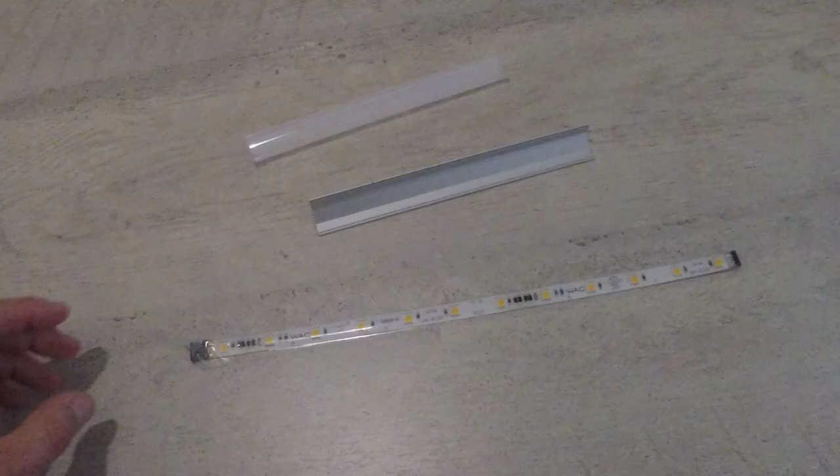So I like to use this WAC LED strip. In my case, I've been using this InvisiLED light, which is the least expensive of these strips because it's the least powerful, but for accent lighting it's plenty bright enough. And it's got adhesive on the back.

And so what I've done in the past, for instance, is this cove lighting up here, which worked out really great. I put it normally in the 45-degree channel, but sometimes in the straight channel. Here's some more lights that are using LED strip with a Z-Wave dimmer, and then they're controlled with SmartThings.

So I'd like to install the accent lights on these two walls right here where the bookshelves are. And what we have at our disposal, we have these light switches right here that operate the three different sets of circuits for these downspots, and we'll probably end up redeploying one or more of those switches. So now, how do we get power up here?

Down here looks like a good opportunity, but these outlets in here are dead as a result of a prior remodeling in which the power was disconnected, and so I cannot get that reconnected directly the way it was before.

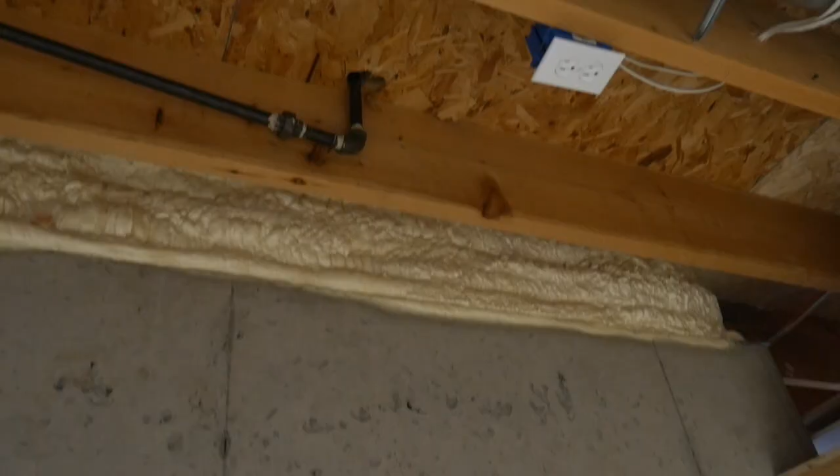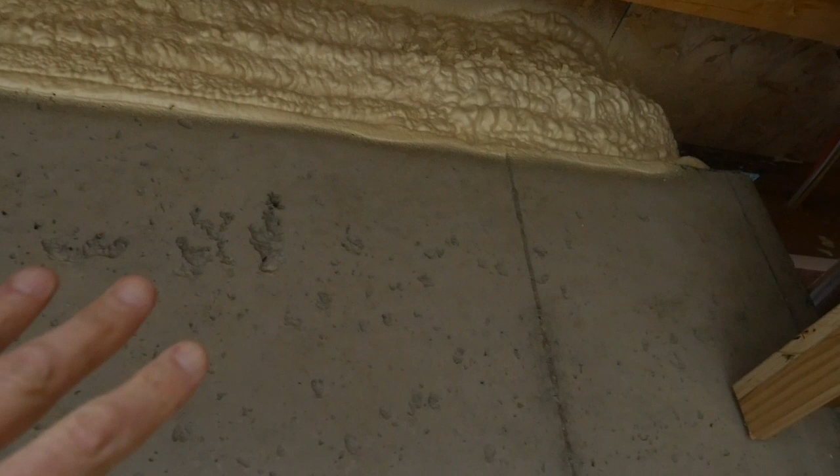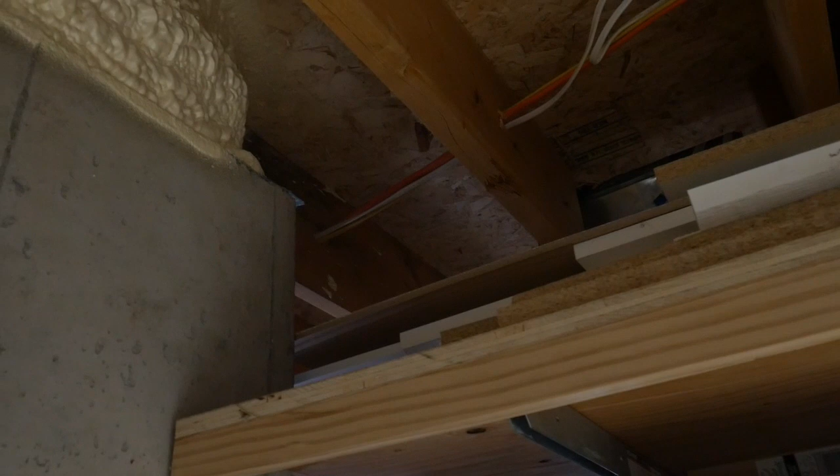We're now in the basement below that space, and this is where the fireplace is. You can tell by the gas line that goes in. The back wall is a little bit deeper than this foundation, a little bit further that way. And the other wall, you can tell approximately where that is by where that duct is. So we're going to be able to put a hole into the floor right about in that area there, and we'll be able to connect to power.

And I've got some slack in that wire right there, which is a circuit that is hardly used. So I plan to connect into that circuit to get the power up there.

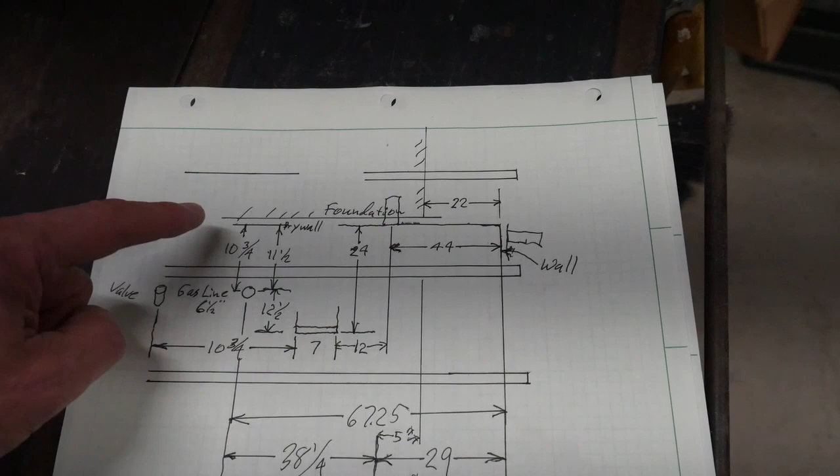I made myself a plan. Now this isn't to scale, but this is an upper view showing where that gas line is, and then where the foundation is and where it ends, and then where the drywall is upstairs is right here. So the center of that space is roughly a little bit inside of the foundation. And this space right in here is where we want to take advantage of this to get a hole drilled through there.

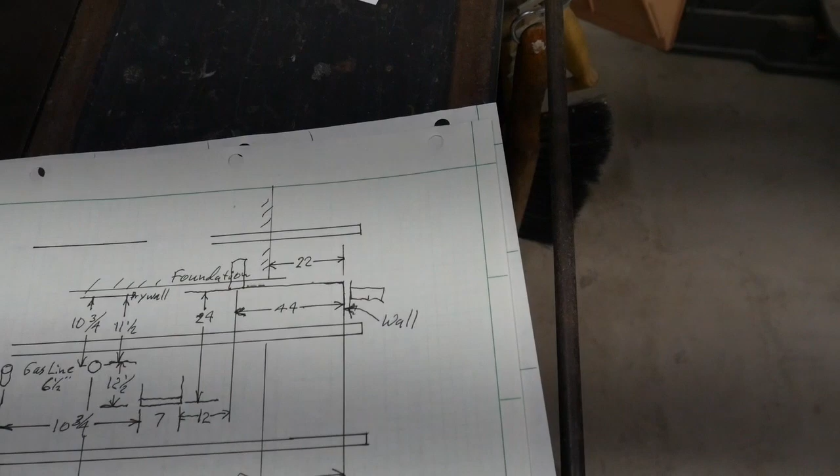And so I blew that up a little bit more and drew it more to scale to show where the studs are in the wall upstairs, and here's where the opposite wall is, and this space right here is the one that we want to reach into and get a line through. So I'm going to do even more measurement and make darn sure I'm going in at the right spot before we drill that hole, but it looks like we've got a window of opportunity to get some power up there.

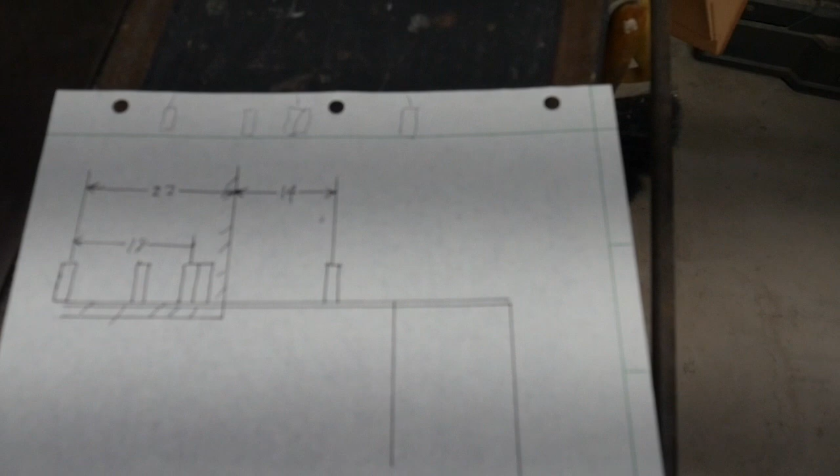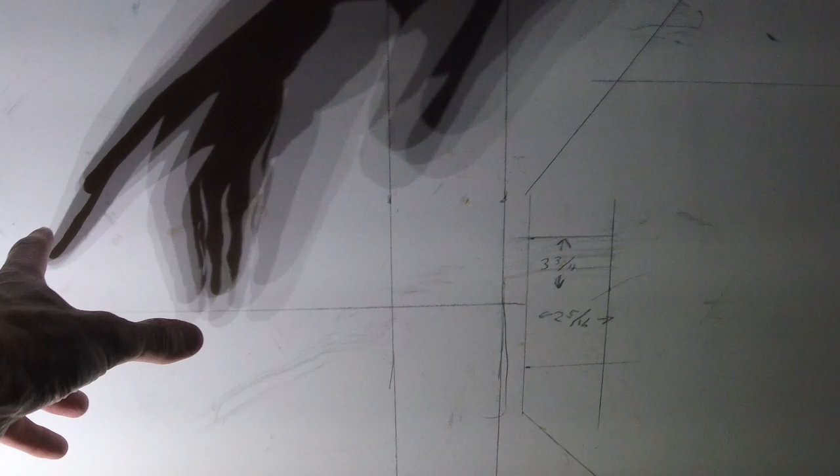So here's our mapping out of this wall. There are two studs right here, there's one right there, and there's another stud right about in here. If I can get access to wire and go to a box right here, great. If I don't, I'm going to have to cut out another hole right here to help span the wire across between these two boxes and across all of these studs. But I'm going to wait on this one until I find out what's going on in here.

And as far as the box goes, I'd prefer to put it directly into the stud with this. Otherwise, my option is to go with one like this where you just grip on the drywall. But that depends on what I'm worried about: the remote chance that there's a wire coming from this one that comes out right there. So I need to open up the wall and then make a game time decision on exactly where this box is going to go.

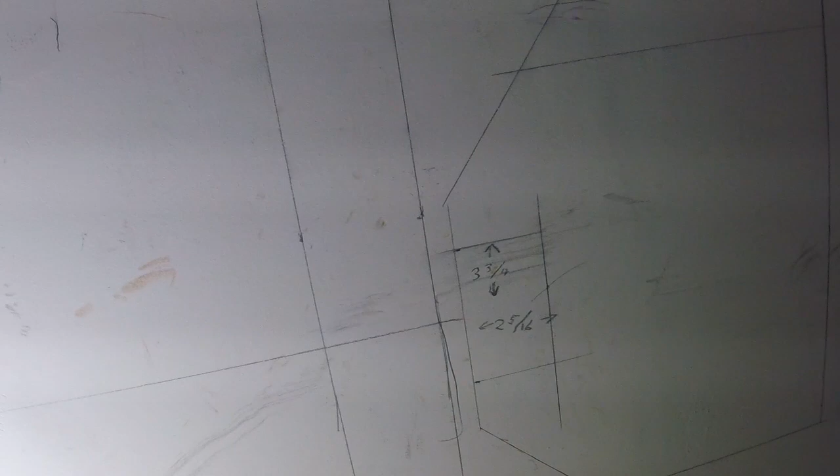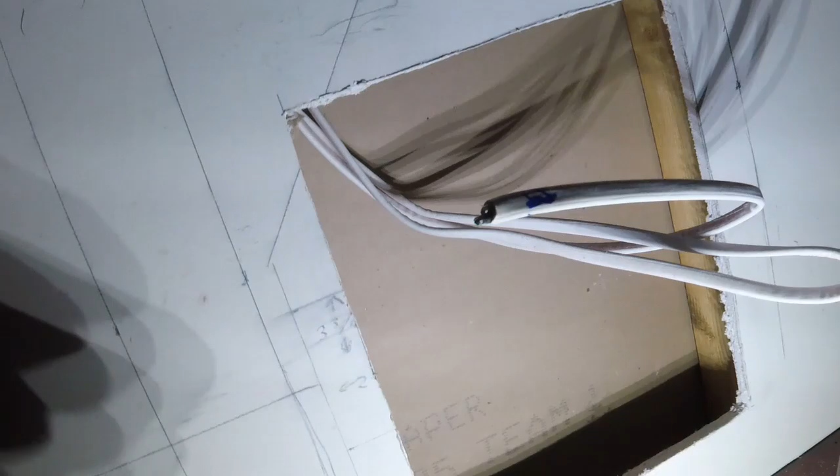So I cut this piece out. That worked fine. I used a really sharp utility knife, and I found out what was causing the stud finder to react up here. It was these wires. I pulled them out and got lucky. They were easy to pull through, and they've got enough slack in them that I'll be able to connect them into this box that we're going to add.

So now the problem is, what are these wires? I confirmed with a continuity check that this wire is connected to that outlet and the other one, so that one needs to be live, but I have no idea what these are, and I can't find anything that's not working right now. So it could have been provisions for something for the future, or maybe one of them is for this fireplace here or something like that.

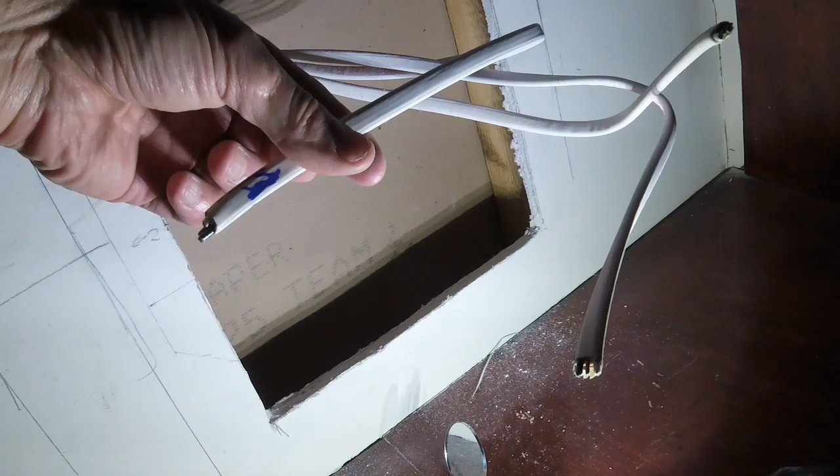So what I'm going to do is put in the new box, connect this live to power, and these two, I'll bring them in the box, but I'll just put wire nuts on the wires and mark them as unknown, because I have a feeling someday I'll discover what those are for.

So I've estimated the drill depth to go through that 2x4 and past the subfloor underneath needs to be in the ballpark of 2 1/4 to 2 3/4 inch long, so I've got just as small of a drill as I could find to get that length.

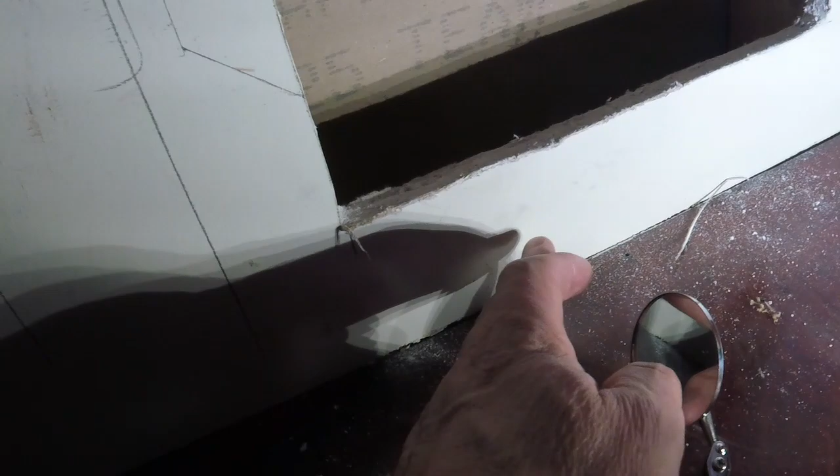And then the second thing is where to put our hole down there. The foundation ends right about here, and there's some wires downstairs right about here. So I'm going to put that hole right about in here, so I'm comfortably clearing the foundation and not going to get in the way of those wires down there.

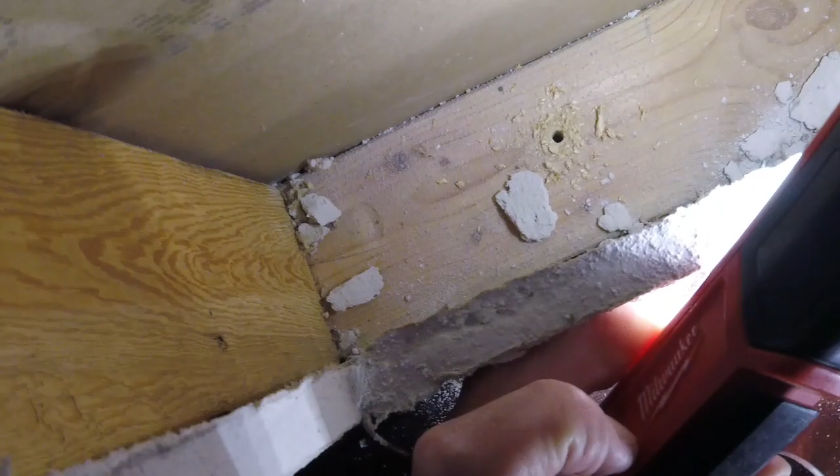So I just drilled that hole, and I could feel it go through, so those calculations were about right. So what we'll do now is set this light over the hole and then go downstairs, see if I can find it. And there's our hole right there, and that's pretty much where I expected it to be. Now I can go through with a through hole with confidence, big enough to put some Romex through it. Alright, that bit's big enough for the cable to go through it. So I decided to use my big drill for this.

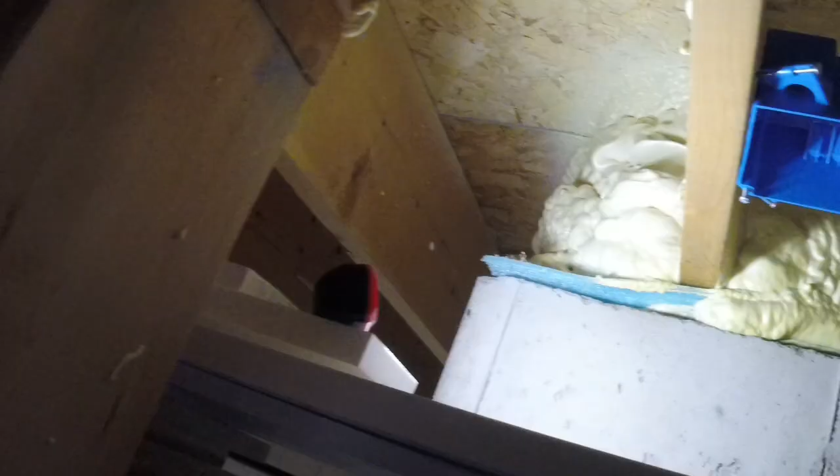Alright, we got our junction box in, and I poked through one of the openings here, and you can see we got plenty of room to make a connection in here. And I can fit the cable through there and then go up through that hole. So let's go ahead and start routing some cable.

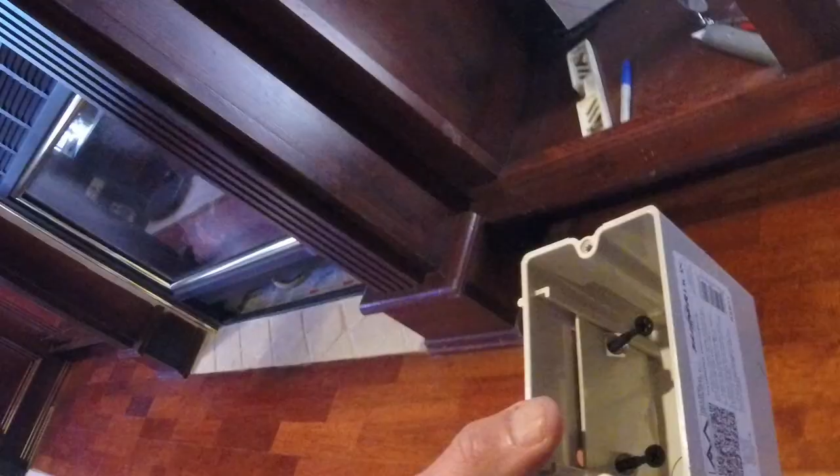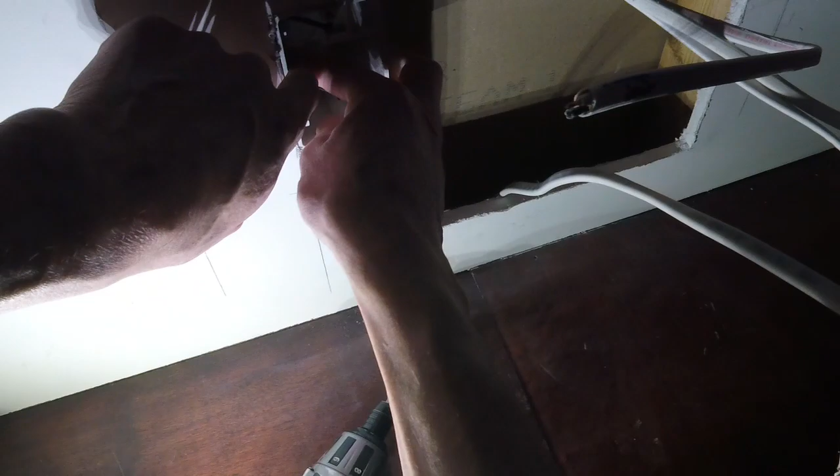Measured the height of that box, and it's right at 3 3/4. So my marking there is 3 3/4. I'm going to go a little bit bigger than that, and then cut all the way to the stud, and then we'll secure this to the stud. Okay, I've got these things positioned against the stud. I'm going to pull this out and run it into the stud.

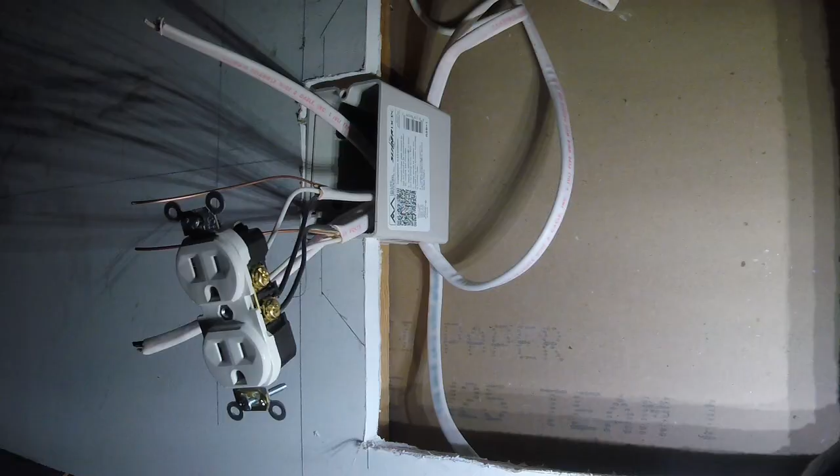We've got incoming power coming from below, and then I've also got the one that I marked as being associated with the plugs, and I've connected those both to this outlet. And then as a double check, let's make sure we've got continuity between the old plug and this, and we do, so we do have the right connection made.

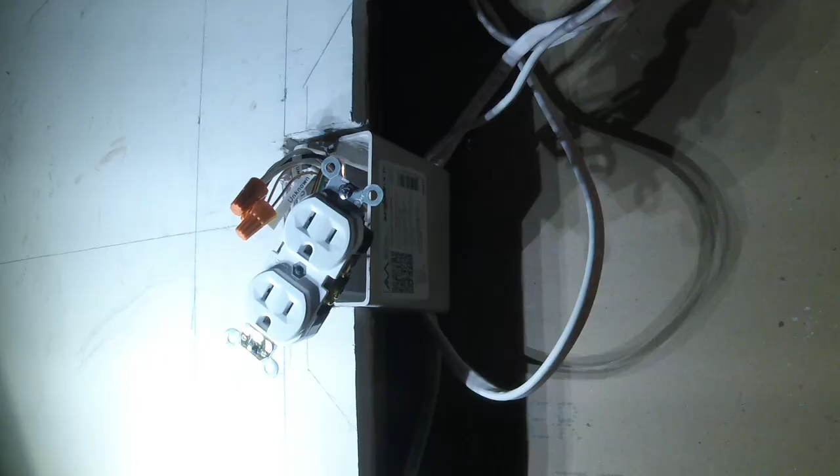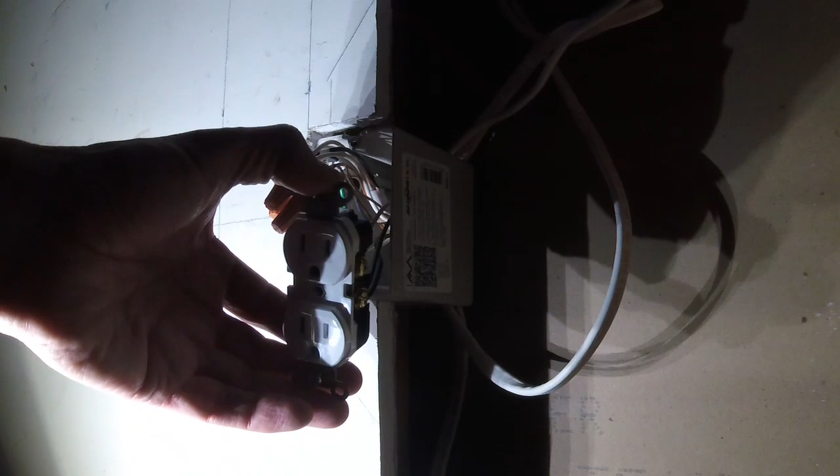So I got this wrapped up now. The unknown wires are just tied together, and I got them labeled and saying which way they're headed, east. And then this one I've now got wired to the power and to the outlets. So now we're ready to button this up, and then we'll get our piece of drywall that we've cut out, get it back in. I'm going to go ahead and change this other outlet out too.

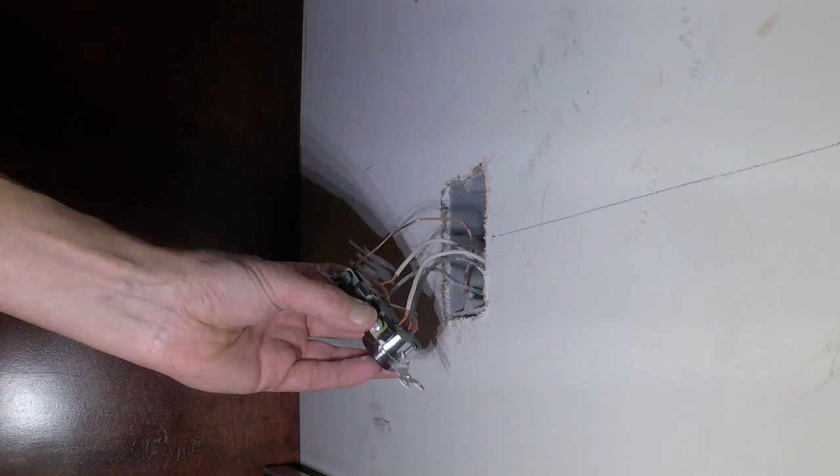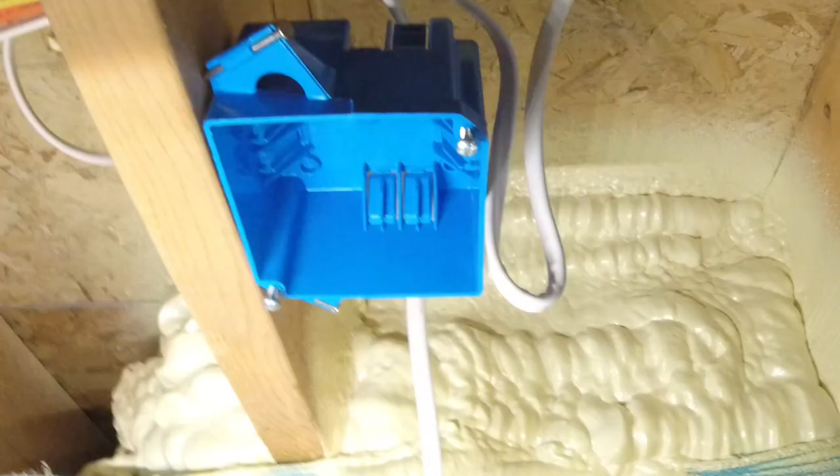I don't know if electricians have a special tool for this, but I ground down a screwdriver that would fit in that slot. Now we're ready to connect power to this wire in this junction box. And so this is the circuit that I want to go into, which is that lightly used circuit that goes upstairs. The thing is, I'm like 99% sure which circuit breaker is connected to this circuit, but I need to be 100% sure before I cut that wire.

So I plugged in a heater upstairs into that circuit, and then I put this on here, and I can see, yep, we're getting a lot of current through there, and there's another wire with no current in it, so plenty of current in this one. So then if I turn off that circuit breaker and come back here and there's nothing there, then I've got the right circuit.

I flipped off the circuit breaker. The heater upstairs is off. I'm getting no signs of current in this thing. So I think that we are okay to cut this. Let's hope for the best, huh? I've cut those before accidentally when they were live, and I can tell you that's a good way to ruin a pair of dikes and scare you.

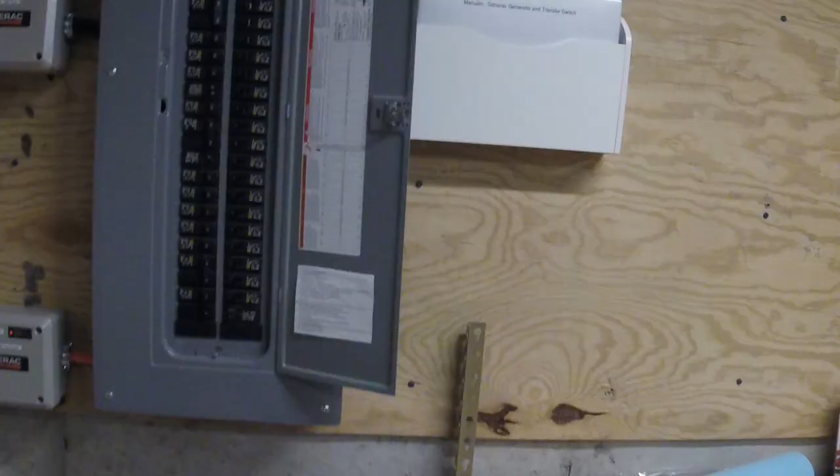Got the wiring all done, so we'll go flip on the circuit breaker, go up and check everything, and if it's okay, we'll put the cover back on this junction box. Okay, let's turn our circuit breaker back on. So far so good. I checked the lights in the other room. They look good. This looks good.

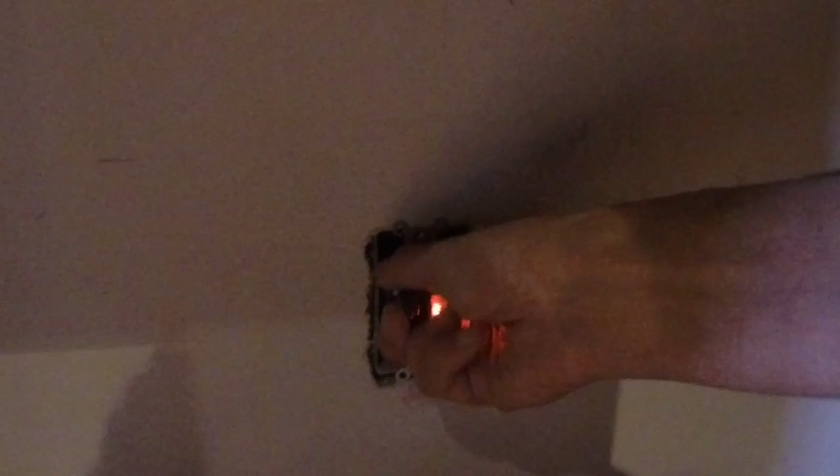That looks good. Alright. I put a fresh blade on this knife and then ran it along the inside edges and the outside edges so that we got a little bit of a chamfer, particularly on the outside, so it's sub-flush, and then there's some place for the spackling compound to go. And then I measured, and we've got 3/8 of an inch right here where the box is protruding from the current drywall. So now I'm going to just cut this piece out.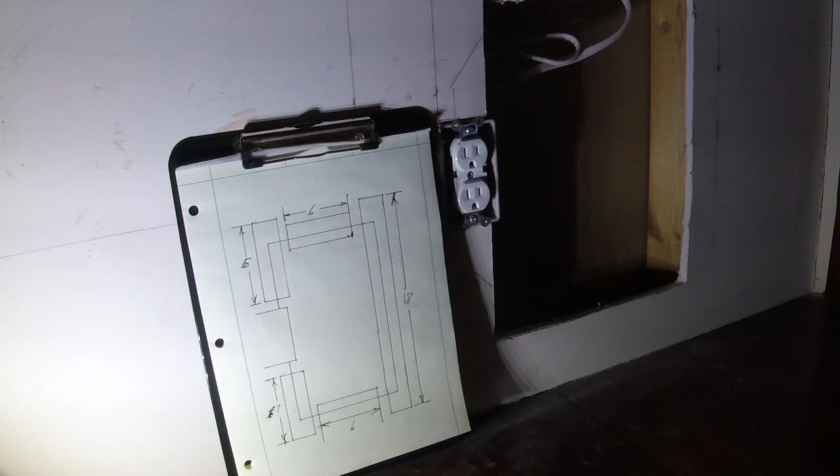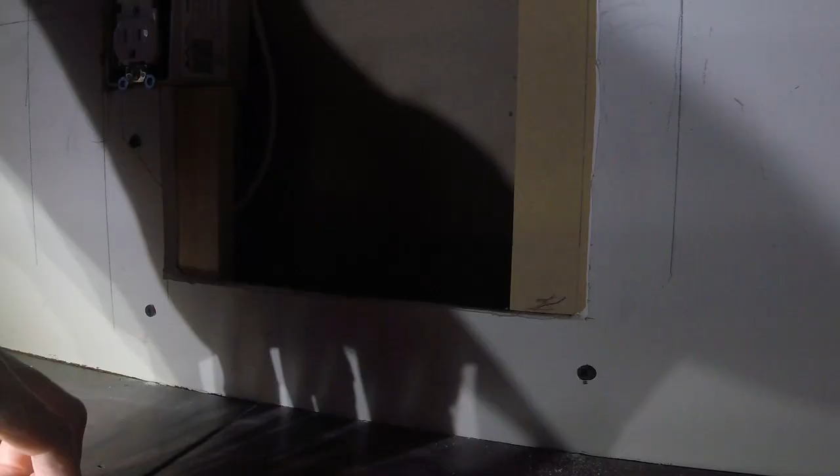So I'll put some strips of pine trim along the edges here, and so I needed a rough idea of our dimensions, so I've got a little map made here. So I'll go cut some of that trim, and then we'll get started putting this back together. Found a piece of scrap MDF, so I used that to make the pieces. The nice thing about this stuff is that it's really easy to self-tap into it. Start to put this MDF in.

So I put a mark roughly where it's halfway across, and this thing is 3 inches. So that means we've got 1.5 inches on either side, and so we need to go in about 3/4 of an inch to get to the middle of that. And I'm not cinching these up completely yet. I'm going to mark where these gaps are so that I don't try to put a screw in there. These look pretty good, so I'm going to go ahead and cinch these up so their heads are a little sub-flush.

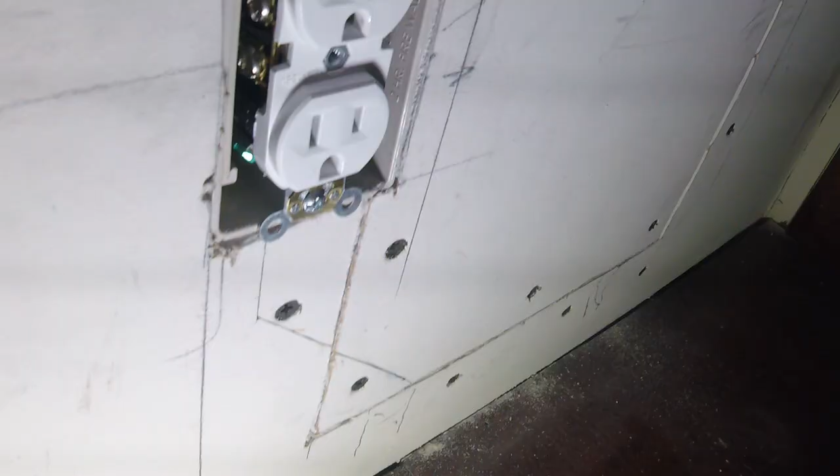Good. It's going to clean up well. So my wife thinks I'm terrible at sanding and painting, so she's taken over on this.

And I'll continue with the glamorous work where I need to route a wire from here basically up through the corner of this cabinetry. So I'll start drilling holes up through here until I get to the top. So that's the kind of connector that I've got to get up through the wood. And so instead of drilling a gigantic hole, what I'm going to do is drill 2 holes side by side and then clean it up to make it into a slot using a Dremel tool.

So there's a hole up in that corner there now that we can go up. And then on this level, for some reason, there's an extra support right here with a shorter shelf here. And so, problem is I can't get my arm around there, but I've got to get up past this, and then up here, we'll just fit in that gap behind the shelf. And then up here, I've got the hole in at the top.

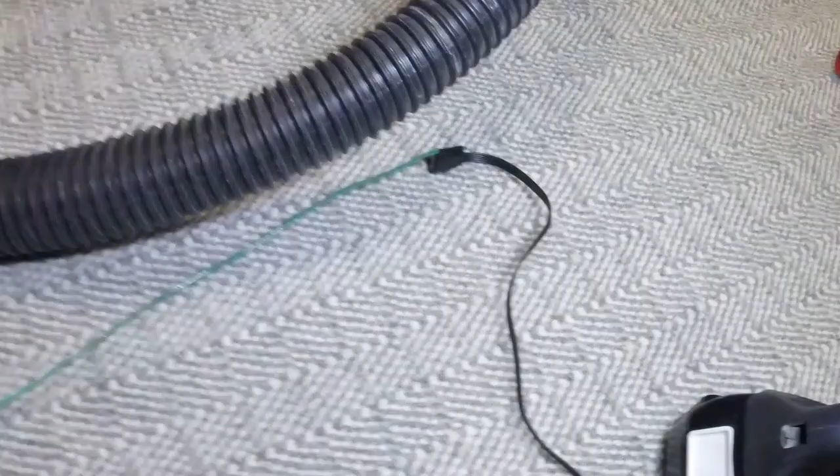So what I'm going to do is I put a wire on the end of this thing, and we'll push the wire up, and I'll be able to grab the top of the wire and then pull the rest of the cable up from there. So I was able to feed that wire up through that hole, and now you can see the green solid core wire there. So I'm going to grab that and pull it the rest of the way up, and then we'll feed it up through the upper hole.

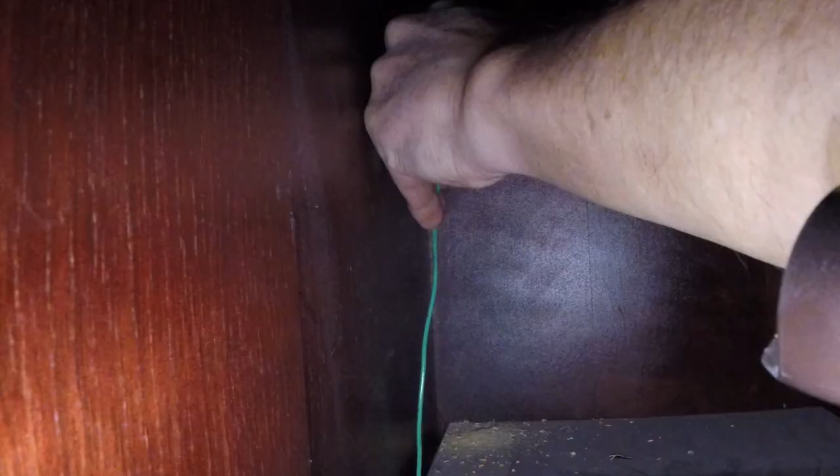Alright, I got one strip plugged in, and so it works, and it gives you a little bit of a feel for what that'll look like after we've got all the strips in. So my wife finished sanding and painting the wall, so it looks pretty good, and she wonders why I'm not done yet. I've got a little ways to go still. I got this Z-Wave dimmer installed and connected with the SmartThings, and it works pretty well.

So I'm going to adjust this dimmer with the SmartThings, and so I've only got a few pieces installed up there. But what I wanted to do was check on the pattern, because I was thinking about just putting in a 45 right here, and it might be simpler, but when I tried that I wasn't getting enough light in the corner, so I tried this, and yeah, sure enough, we get better light when we let these things overlap. So I'm going to follow the original plan and overlap these.

So I picked these up on eBay. So this is an aluminum channel with a diffusing cover on it, and then we'll lay the LED strip on that flat surface right there. So I have to cut many of these for the specific place where I'm putting them. So I've marked where I'm going to cut it, and to get the hacksaw started, I'm going to make a groove with the Dremel tool. So got a groove started there, and now we're ready to cut it with the hacksaw.

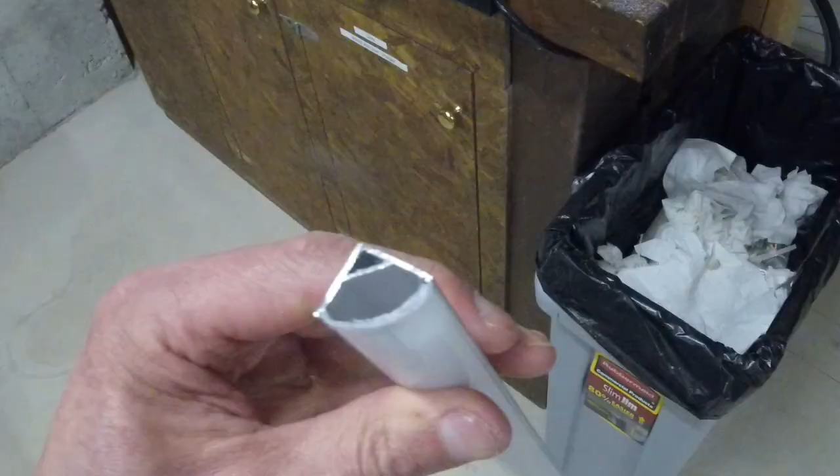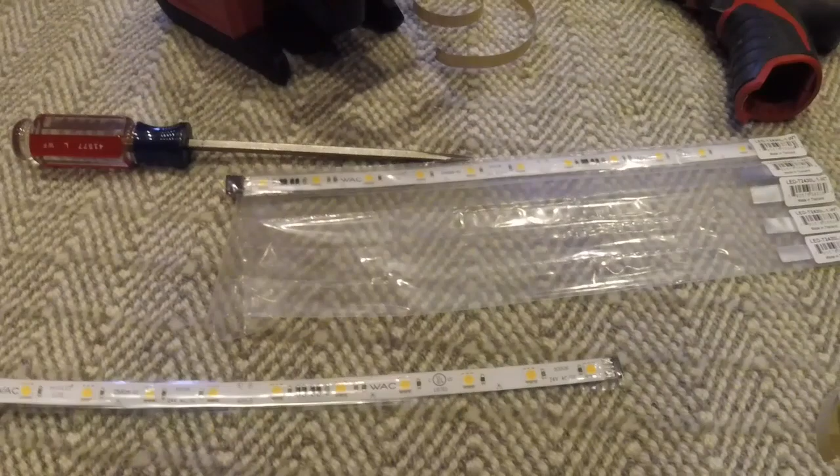Alright, it's cut, and I deburred it with a file, so we're ready to go assemble this. So you can get these LED strips in 1 foot, for example, or I bought a 5-foot strip here. It's a little bit more cost-effective per foot this way, and this is a pretty long run, so I will use the long one, and then I'll have to cut the end of it off.

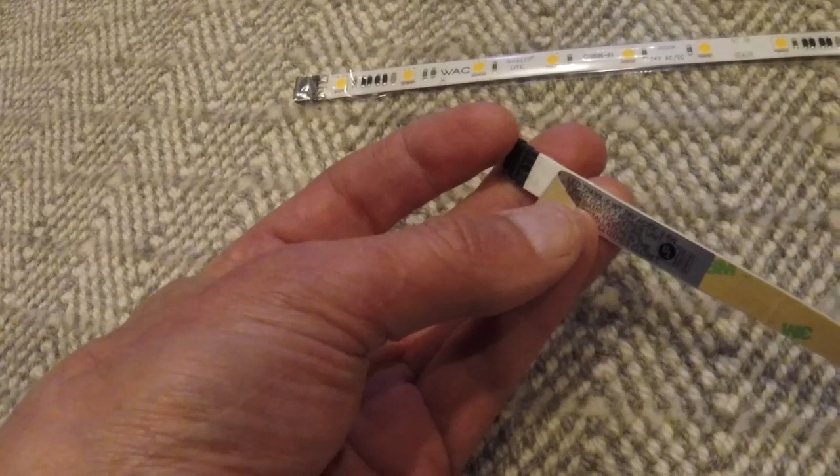So I got to peel off the cover here, and then this paper strip on the back is where the adhesive is, and then I've got to take the end off of that to expose the connector. So we've got the previous strips laid out here, and then here's the connector I'll have to put in here. So I'm going to start setting this strip down in this channel.

So these 2 aluminum pieces, I'm not planning to join them in any other way. I just lay the strip across it and let that hold it together. It seems to have worked pretty well on the other ones. This tape has these lines where it says where you can cut it, so I actually adjusted this a little bit so I could set that cut mark right at the end. So I'll go ahead and cut that now.

Alright, strip is cut and placed in the channel over here. Okay, got it plugged in and it's working. So now we'll put the diffuser cover on it. Alright, the diffuser's installed. Last thing is I get a little bit of light bleed at these junctions between the cut aluminum channels, so I've been putting a little piece of electrical tape across that. Okay, that electrical tape took care of that.